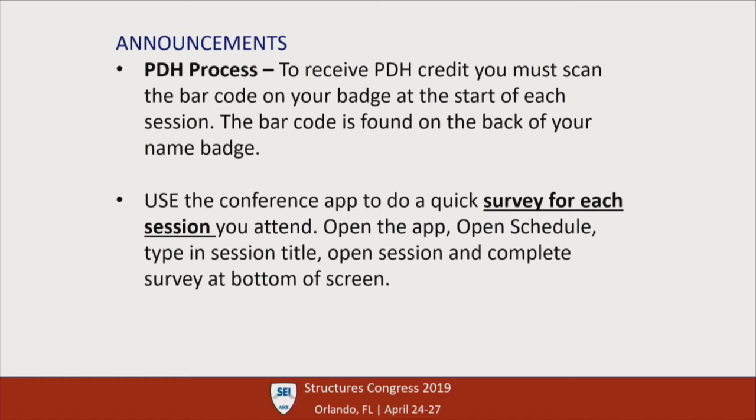This is a live stream session, and today's speakers, I'm going to present them all at one time so that we don't take time from them. There will be 4 presentations.

The first one regarding I-75 over SR-50, Twin Bridges, by Henri Simpson, Principal Associate from Hardesty and Hanson. Second will be the North Washington Street Bridge by Piyush Rohela, project engineer, and Edward Bowman, senior project manager at Alfred Benesch and Company.

The third presentation, Why Are We Building a Bridge Here? The Replacement of the Bonner Bridge, by Dominic Coletti, Principal Professional Associate from HDR. And then the last presentation is about the I-75 Segment Ramp H4 Twin Top Girder Bridge by Leo Rodriguez.

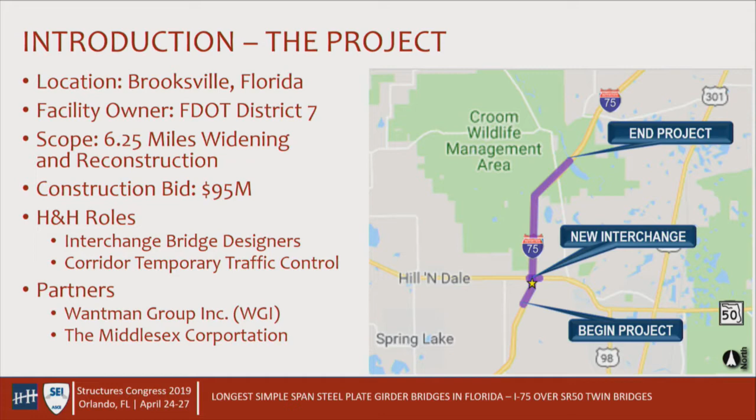So just to kind of establish the needs for the project, the interchange itself was substandard. I think the bottom line really says everything - with the projections of traffic, there will be a level of service of F at that particular intersection. It was one of the traditional urban interchanges you see around. The existing bridge itself had some issues. The clearance, probably the major one geometrically, but really this is more of an obsolescence, a need to upgrade the interchange entirely. There is a history of trucks hitting the bridge because of the low clearance, but the bridge itself had some more service life in it, even though it was from the 60s.

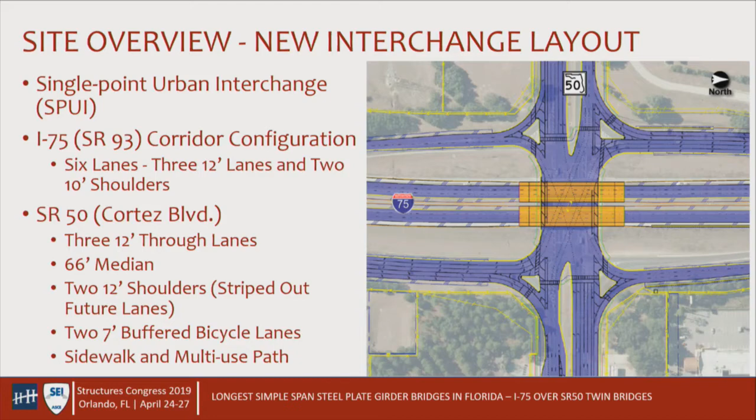Also, if you just think about some of the sight lines from those ramps all the way out there that you need to be able to see through, and those spui's in general, they need to have no piers allowed in that whole blue area below the bridge to allow for those turning movements. So you can see why this bridge is getting long.

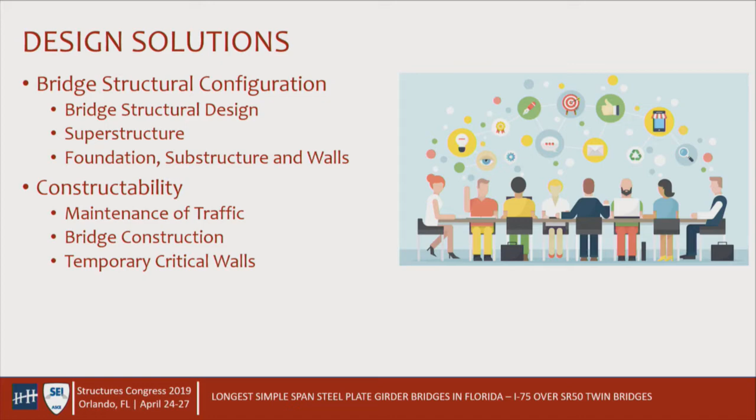So now to try to go through our design solutions, we're going to talk about the bridge itself and why we made these choices, and then how we implement them with the maintenance of traffic and the constructability concerns moving through the project. So the structural configuration. The record number is 298.5 twin simple span bridges. I think we missed the national record by a few inches, but inches matter sometimes.

The bridge width is nothing big about it. It's 59 foot 1 inch wide. That 1 inch is for a half inch that floats around in the parapet widths. We designed it for 6 lanes, but with provisions for future 8 lanes, and also some considerations for the future 10. Vertical clearance was set for the signs and whatnot, and also had to include some live load deflection, which is not normal, and we'll discuss that a little bit more moving forward.

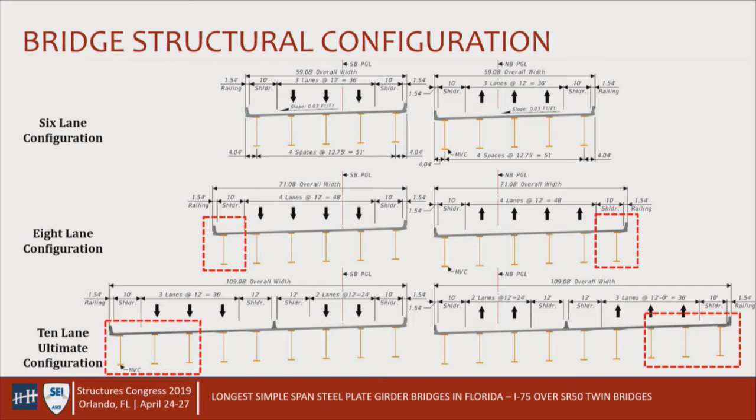So here's a typical section. The 6 lane is what we're designing for and building right now, and we had to think through the 8 lane. The 10 lane was a little bit way in the future, but our provisions can handle the 8 lane configuration. You can see typical sections, there's nothing abnormal about it, so it's just the depth of the beams that might jump out at you. In this case, we have steel plate girders with traditional concrete decks on there.

So with that span length, bearing to bearing length that you see there, we kind of got a little bit into la-la land because the AASHTO distribution factors are limited at 240 feet. So in order for us to responsibly proportion the live loads to those girders, we needed to do some calibration of our own, and it's something that we've done a lot. Leo will talk about it more later too. Using those MDX design type tools, we calibrate it with a CSI model that allows us to have an independent check and make sure that we're not doing anything that we shouldn't be able to do.

And also this live load deflection. Now, in addition to capturing the live load distribution, we wanted to have a check of the natural frequency of the bridge, being that it's that long. We want to make sure we won't do anything that jeopardizes it from a resonance perspective. So the girders are 10-foot 6 deep web. We use grade 50 in the web, grade 70 in the flanges. It's a 1-inch thick web, and the flanges maxed out at about 3 inches.

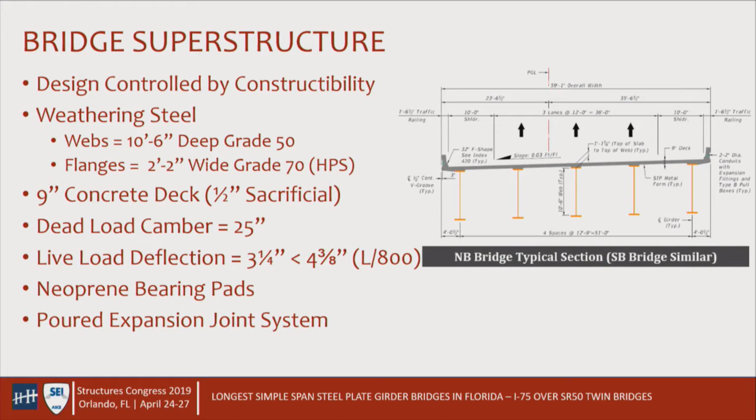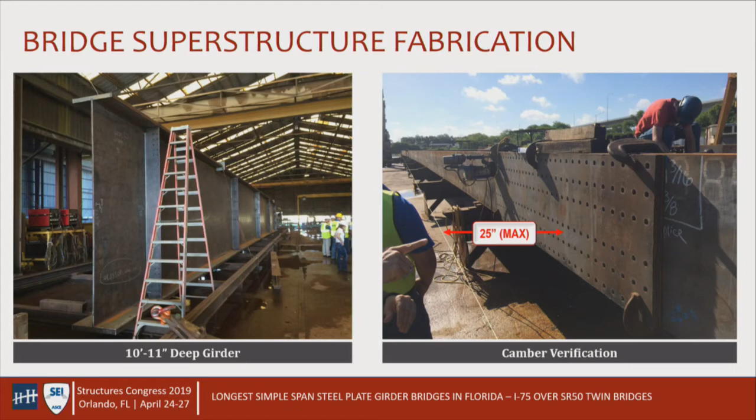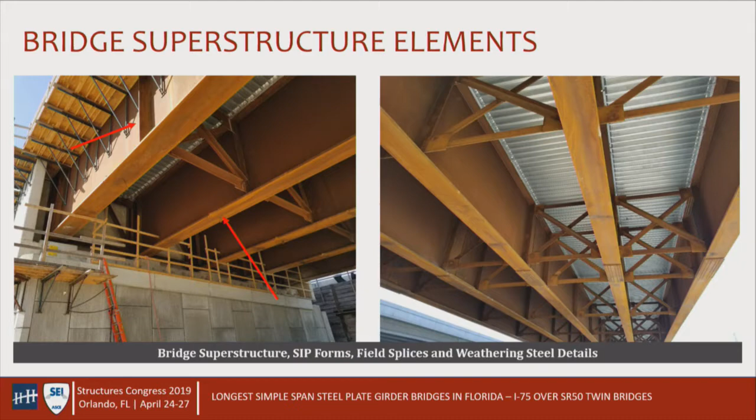Foundations, the foundation itself is just 2 end bents, a single span. We had staggered 24-inch pre-stressed piles, founded on pretty good stuff there, so they didn't have to be too long. The stagger allowed us to not have to worry too much about moment, or overturning on there.

The substructure itself, traditional class 4 concrete 5,500 PSI, and pretty deep back wall because we have to go all the way up to the top of the bridge from those 10-foot girders.

One thing to note, one of the plus issues, is that we actually needed to pour the back wall after we had put all the dead loads on. The rotation at the end of the girders was so much that it actually impacted the back walls, and we had to straighten those up before we could pour those back walls. I'll talk a little bit more about that moving on.

So walls, 30-foot-ish walls that keep the whole structure in the right-of-way. Didn't have enough right-of-way to have slopes. These are proprietary, typical MSE walls you see all around Florida, where you could use steel strips in there since we're not near the water.

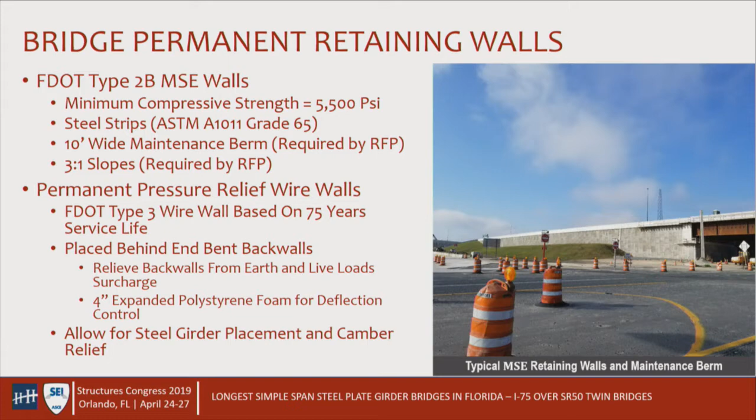And we needed to have some space there per the RFP, the design build. One of the techniques we used behind the back wall was to actually put a wire wall that was going to be buried behind the back wall permanently, to relieve the lateral loads on the back wall since it was so high, and also allowed us to have an embankment fully built and compacted before we even put the girders in place. So it gave the contractor some more flexibility in staging his work, and also allowed us to build that back wall after the deck was poured onto the bridge.

So how do we implement our design? Again, this was a design build contract type, so there's a lot of interaction with the contractor on how we go about doing this.

I won't talk about the drainage requirements too much, but it did control the width of the temporary structure you'll see in a second, because this is an interstate facility, and we need to make sure that hydroplaning and those things are taken care of when we narrow bridges. So we needed to make sure we had temporary drainage considerations.

The steel girder erection strategies was something we worked through a lot with the contractor and the erector. Temporary critical walls to be able to make cuts and give us space to build things. And I mentioned those camber and deflection implications a little bit with the back wall, and we'll talk a little more about that as well.

Now, MOT does drive these projects a lot, keeping that traffic flow on I-75. It can never stop. So in a way, that's one of the big design constraints on us: how do we keep traffic moving in these high-speed facilities while we build these systems.

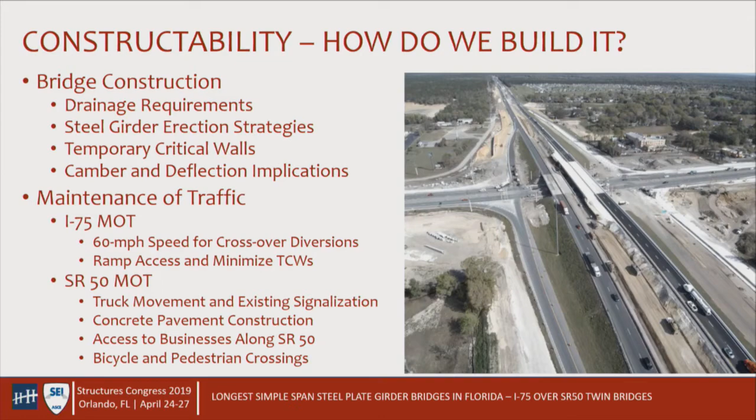So, construction sequence: the contractor built the northbound system first, but in order to do that, we needed to be able to move traffic off of the northbound existing bridge onto the southbound. So we had to widen the southbound bridge to allow 2 lanes of traffic in either direction. There is a temporary widening of that bridge as part of this contract.

Once we widened that bridge and moved traffic over, we were able to make some cuts to make space for this much longer bridge into that position. Just to give you a little perspective of the size, the existing bridge was 174 feet long, 4 spans. So we had to get much more space cleared out right adjacent to that existing bridge, since we were putting everything back on the same alignment to save fill and embankment for the project.

And so there's a lot of wall work here. So once we've got that northbound traffic onto the southbound bridge, we can build the new bridge, move traffic back over, and then do the same to the southbound bridge.

So that's a good picture looking north. You can see the northbound bridge being constructed, and the traffic's on the southbound bridge. So the widening was larger than the existing bridge was, and again, that was because of the drainage requirements, needing to give enough of a shoulder so you could have that spread.

Superstructure and substructure were just basically what was there, the cheapest kit you could get to put out there. But there's a lot of wall systems. What's interesting about the walls is that we use these temporary walls on one face with soldier pile lagging, and then we build next to it with wire wall, and then that wall comes out. So it's almost like a 2-sided wall setup. I'm not sure you can see that here, but that's the approach.

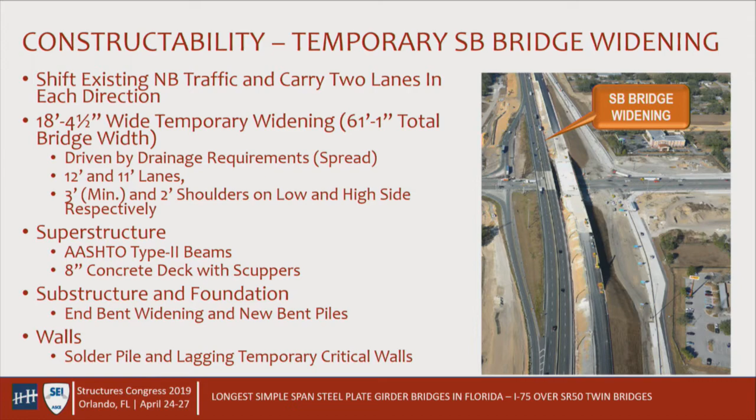So this is your temporary soldier pile and lagging walls, and against that, closer to where the picture's taken, you'll be building up the new embankment with a wire wall, because you're going to have to remove that lagging once we've moved traffic over.

So with the bridge erection itself, one of the innovative things that we came up with during this project was to reuse the existing piers of the existing bridge as temporary shoring. Because we're limited to about 130 foot of length of girder to transport, we need to have a couple of splices to make up 300 feet. And we designed our girders strategically with the existing piers in mind, doing things like putting a stiffener bearing right over the temporary bearing area, and making sure our splices had enough space to be put together outside of the footprint of these piers.

So this saved some time in putting temporary shoring in place, and gave us a pier that we knew was going to work. So in this picture, you can see the existing southbound bridge to the left with the widening, and on the right, this is the northbound with one additional pile to use as that temporary setup.

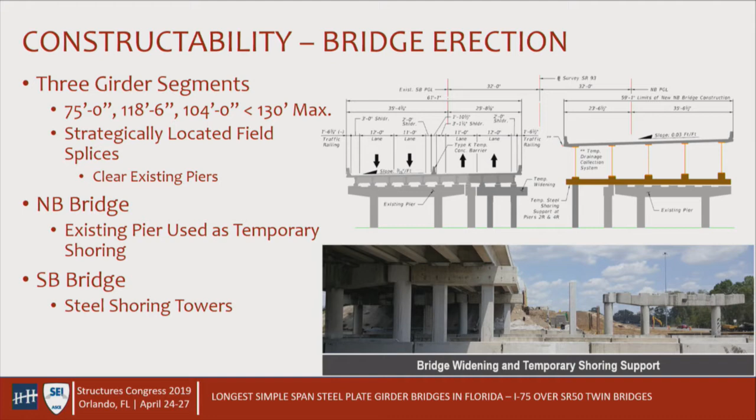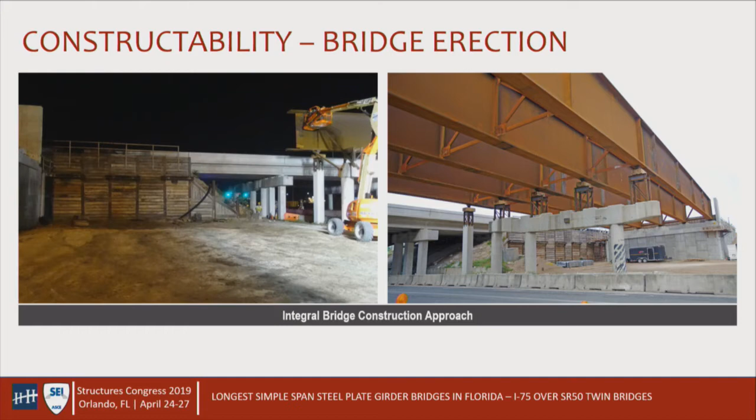And there you have the bridges. Looks like all 3 pieces of the bridge is in place with the temporary shoring of the existing pier. And you can see the back wall in the distance on the right picture is not in place yet, just a cheek wall, so you can see daylight back there. And on the left picture, again, another image of that space we created with that soldier pile lagging wall. So that was a long night out there, but it was very nice to see it get in place.

So here's another one of these plus issues. We were able to use the most durable bearing setup there is, a nice neoprene elastomer. But with the amount of camber and rotation, once you start putting load on that with the deck pour, you start to get a lot of horizontal movement with these bearings. On a shorter bridge, usually those movements are within what's tolerable, and you don't need to worry about the stability of the bearing.

But in this case, we needed to be able to get that deck pour, flatten everything out to where we want to be, and then jack to reset those bearings. We checked all the bearings to make sure they hadn't exceeded their allowable deflection, and if any did, we replaced those, but we reused almost all of them. So you can see some of the movements here from the dead load itself are not trivial movements, and it's something you need to consider dealing with a very long span like this, is how are those end lateral displacements affecting your bearing initial set and back wall.

So in closing, this was a great project for us, very challenging, that in the design build environment, getting to work through these issues with the contractor and vet our ideas directly with the person who's going to be implementing it was great. It is another one of those things that we've seen, that the new demand on right-of-way and traffic service is pushing us into these different interchange configurations, which means that we have to come up with different structural solutions for them. And again, this conventional plus concept - yes, in cross-section and maybe elements, it's a normal conventional project, but there are some things you need to put a magnifying glass on when that plus comes into conventional. So thank you very much.

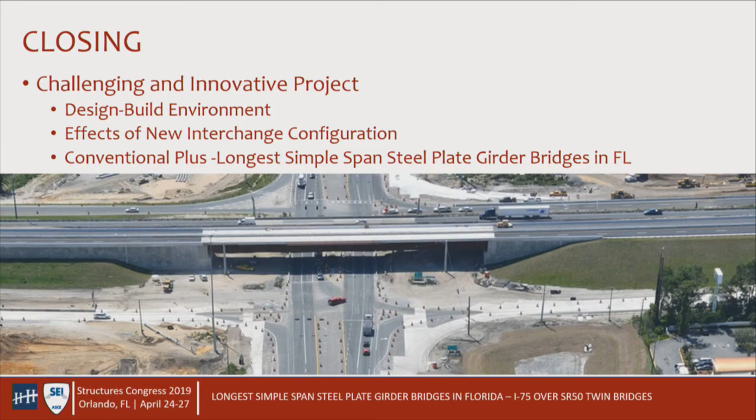Thank you, Henry. Good afternoon, everyone. I'm Ed Bauman with Alfred Benesch and Company. I'll be talking about the North Washington Street Bridge replacement up in Boston. Piyush Raella will come up midway through our presentation and talk about the structure itself. I'm going to focus on the development of the roadway that the bridge carries.

The City of Boston is the owner of the bridge and a major proponent of the project. Mass DOT Highway Division is overseeing the design and construction of the structure. FHWA is our lead federal agency, and all three are participating in the construction costs. Alfred Benesch and Company are the lead structural and civil highway engineers, and Rosales and Partners are the bridge and highway architects.

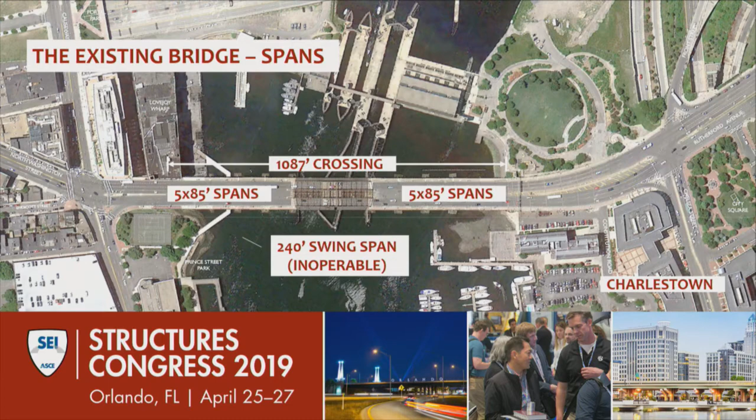The bridge is located between two traffic-signalized intersections in Boston. You can see from this aerial view that a lot of parks have been developed along the Charles River, creating an exciting, up-and-coming area of Boston, and the value that the replacement of this project will help add to the area.

The existing bridge carries 42,000 vehicles per day. It also carries 4 major MBTA bus routes, as well as healthcare shuttles in the area. A recent study identified this corridor as a hot spot for major delays for bus travelers, and while buses make up only 3% of the vehicles, they could carry up to 34% of the users of the bridge. There are also cyclists and pedestrians crossing the bridge.

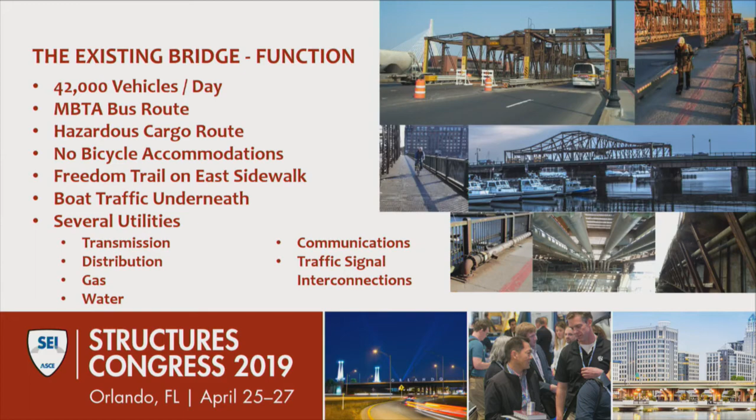The bridge has been in service for about 120 years. The marine environment is extremely corrosive, and the city has been spending about $2 million a year for the past 15 years maintaining this structure to keep it open to traffic. A lot of steel repairs happen, and every inspection cycle brings new repairs. Eventually it was decided to replace the structure completely.

Since this structure is considered eligible to be listed as a historic place, a replacement triggers a Section 106 review of the National Historic Preservation Act. This review is a collaborative effort between FHWA, the State Historic Preservation Officer, Mass DOT, the City of Boston, local historic commissions, and the Native American councils. The result of this process is a memorandum of agreement listing design requirements to allow the replacement of this potentially historic structure. The requirements for this project are to create a gateway bridge, provide a context-sensitive design, and distinguish the structure as a place in itself.

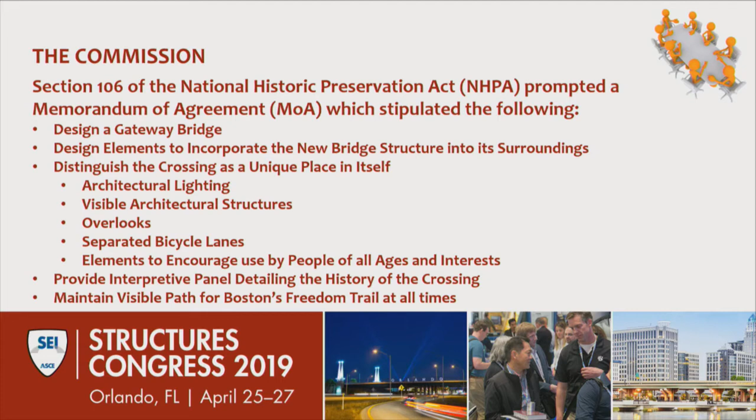They recommended architectural lighting, architectural structures, overlooks, and a separated bike lane. They built into this memorandum the need to provide elements to encourage use by people of all ages and interests.

This memorandum of agreement is consistent with Mass DOT's healthy transportation policy and statewide Complete Streets program. A Complete Street is defined as one that provides safe and accessible options for all modes of transportation—walking, biking, transit, and vehicles—and for people of all ages and abilities.

This Complete Street design is also another collaborative effort with MassDOT, City of Boston, MBTA, which is our transit authority, DCR for the parks in the area, and all the advocacy groups for pedestrians, cyclists, and transit users. The result of this effort was 57.5 feet, that's how close we got to negotiating every foot of width of this space.

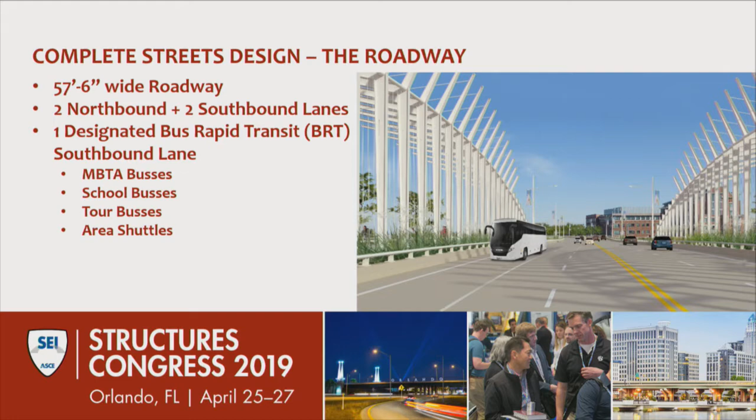On the other side of the planters, we decided on having a 7-foot wide bike lane in each direction following the traffic direction. The 7-foot width allows for faster cyclists to pass slower cyclists. There is a 3-inch high vertical curb that provides vertical separation between the bikes and the 10.5-foot wide sidewalk on each side of the bridge.

And that pedestrian railing is an aluminum stainless steel illuminated railing system.

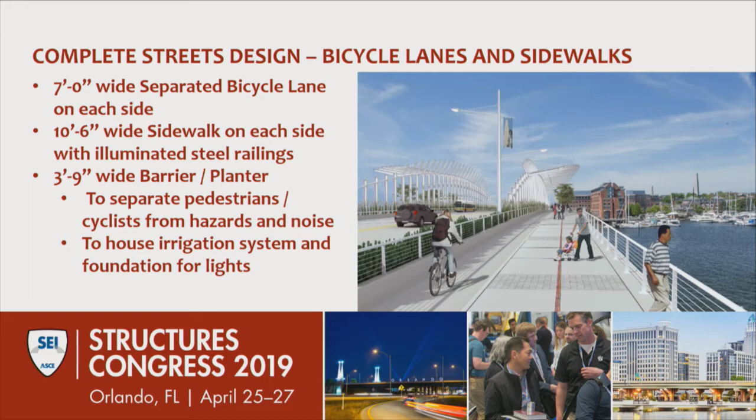And then the sidewalks widen up to 19 feet to create those overlooks, which will have tree planters and benches to allow a place to rest across the bridge, get some shade halfway across the bridge, designing for someone who is 8 and 80. So if you need a place to rest halfway across the bridge, we have one.

And there'll also be landmark plaques describing the views from the bridge. There's the Bunker Hill Monument on that view there.

Since this bridge had to be designed in the context of the area, it could not compete with the Zakim Bridge. The Zakim Bridge is such a massive structure, it couldn't contrast or compete with that. So this bridge was viewed as a viewing platform for all the views of the area. So the unique structure had to come from the substructure of the bridge.

If you've seen the Zakim Bridge, it has 300-foot high inverted Y pylons. And you'll notice the architect built in an inverse of that with V-piers for our structure.

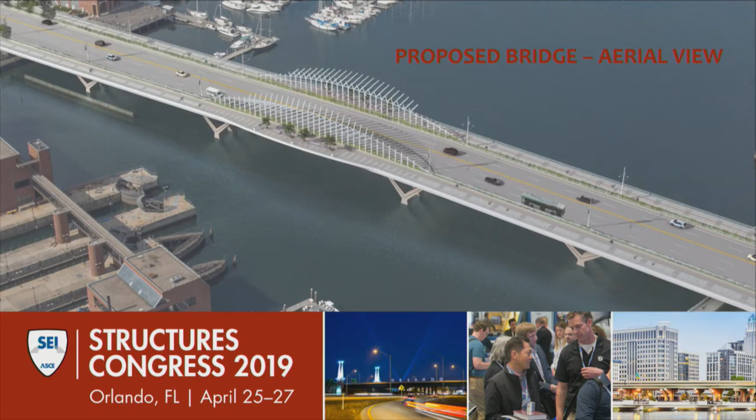Both the architectural trellis and the V-piers will have accent lighting, so they can light up the area and match the lighting on the Zakim Bridge, which changes colors due to the holidays or sporting events.

And now I'd like to invite Piyush to come up and talk about the bridge structure.

Thank you, Ed, for providing us context to this bridge's design with these mesmerizing, very colorful renderings. Now we move on to the more black and white portion of the bridge design, or if you attended the plenary session today morning, the part of the presentation where we say structural engineering inside.

The choice of the cross-section of the bridge was determined by two factors: the use of conventional methods of construction and a high score on constructability. The geometry of the cross-section, however, and the layout of a lot of the cross-section elements you see here were determined by two high-pressure fluid-filled transmission lines that were going under the west sidewalk. These not only could not be moved anytime during the construction of the bridge, but also had to be supported every 10 feet throughout the duration of the entire project.

The steel box girders were chosen for their high torsional rigidity and for a shallower profile compared to the I girders. They were also 6.5 feet deep to allow convenient inspection in the future.

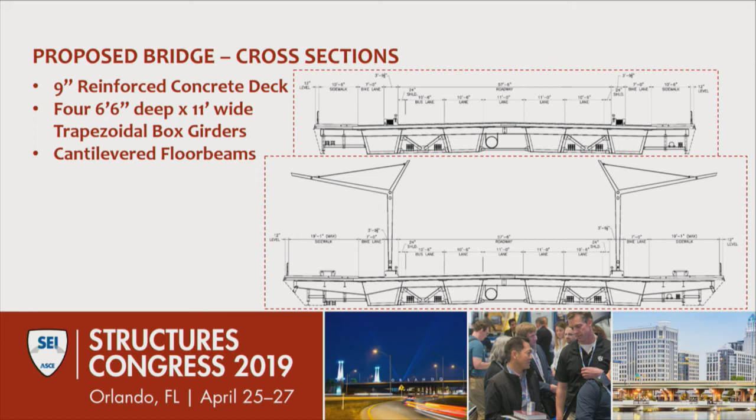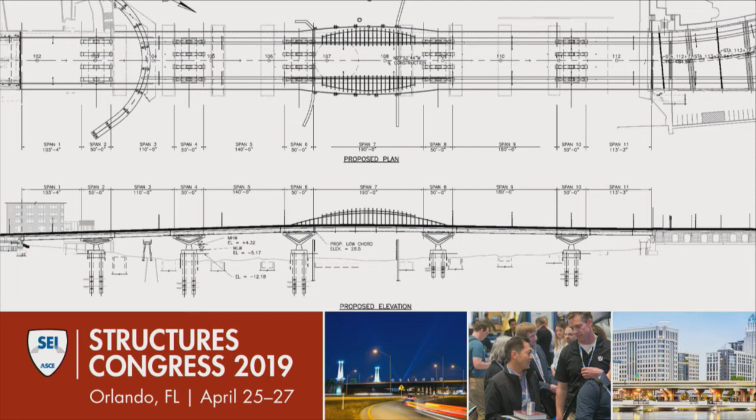The city of Boston is known for a lot of things. However, good soil profile is not one of them. Under 30 feet of water lies 30 feet of silt and clay, below which we find some quality glacial till. The 30 to 80 feet deep drill shafts were rock-socketed, or would be rock-socketed, 10 to 27 feet into the rock strata to get the desired geotechnical resistance.

Here you can see several views of a typical V-pier. Underneath each girder is one V, which is supported on one column. And 4 Vs constitute one V-pier. They are supported on a 5-foot thick drill shaft cap, and underneath are 8 6-foot diameter drill shafts.

The way the tie beam ties the arms of the V-pier is shown on the left. In stage 1, a precast tie beam is just placed on a shelf created on top of the arms. The post-tensioning threaded rods are put in, and it's post-tensioned to 300 kips. What it does is bring the arms closer together and help later on when the dead load is added. After the first stage of post-tensioning, the joint between the arms and the tie beam is grouted, the closure pour is completed, and an additional 2,000 kips of post-tensioning is applied.

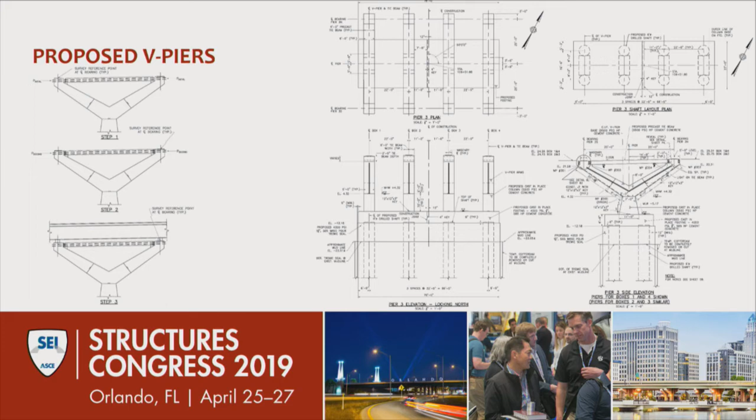Next, the ducts are grouted, the steel is erected, and then comes the deck pour.

The cofferdams were designed to minimize the time spent in water and to minimize the overall footprint of the foundation. On the top right, you see the proposed platform that can be used to create and support the V-pier arms.

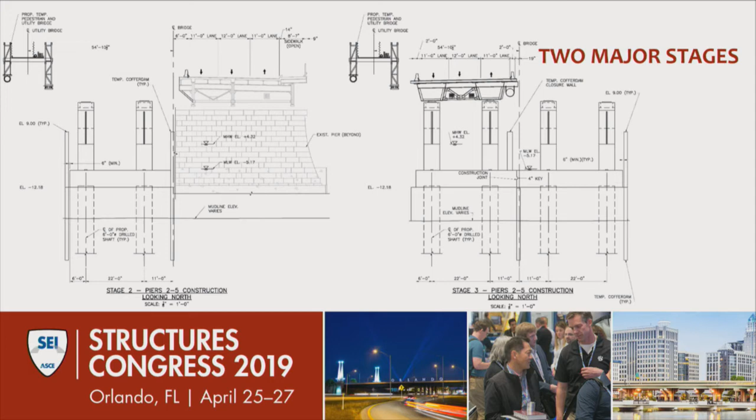The box girders also allow 2 major construction stages where half of the bridge longitudinally would be acting as an independent structure itself. On the left of both these views is the temporary utility bridge, which would be in place throughout the construction of the new bridge.

Midas Civil was used to create 2 full bridge models, one with the substructure and one without. The model without the substructure was used to design the superstructure. A separate model in MDX was independently created, and the similarities and differences of the results were analyzed until a good confidence level was reached. The model with the substructure was used to determine the forces for substructure design because that accounted for rotations of the pier as frames themselves.

After the forces were determined, the substructure was independently analyzed and designed using Midas Civil and STAAD. LUSAS was the software of choice for seismic analysis.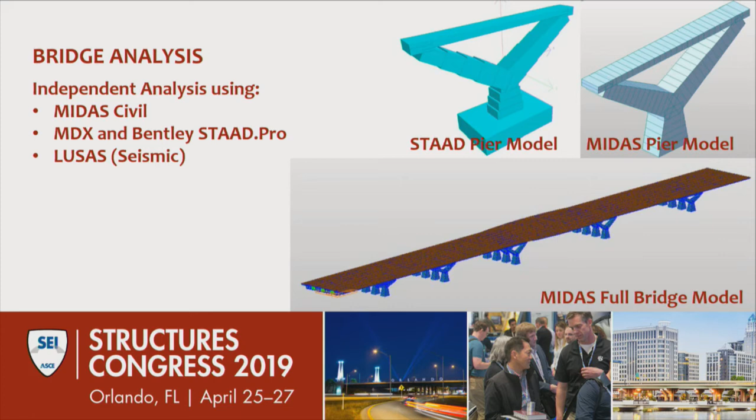Here we can see the rebar arrangement on the left at the top of the arm. You can see it's really congested. It also shows a 12-inch long closure pour with the tie beam, and below that is a shelf where the tie beam is initially placed before it's post-tensioned and grouted.

On the top left, we can see the cross-section of the tie beam again. It shows currently 8 post-tensioning threaded rods, which have now been updated to 10 to introduce more post-tensioning up front. On the lower left, you can see the typical cross-section of the V-pier arm. What's interesting is that the reinforcement in the arms is offset laterally so that it can cross each other clear at the base of the V, as seen on the right.

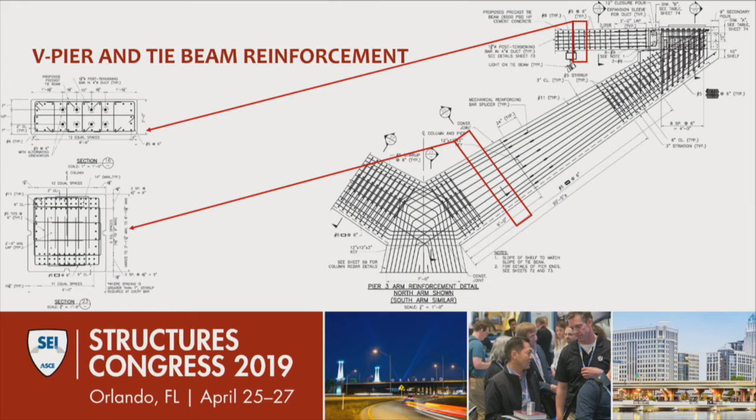This is a similar cross-section, except it's at the center of the bridge where it is at the widest. Notice the 19-foot, 1-inch wide sidewalks, deeper floor beams to carry these long cantilevers, and extra stringer to support the widened sidewalks.

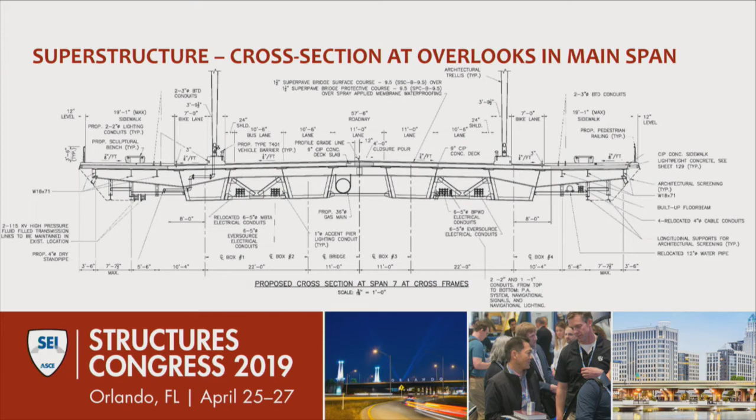Another similar detail, except at the widest portion of the bridge, with a really long cantilever and an additional stringer to support the widened sidewalk.

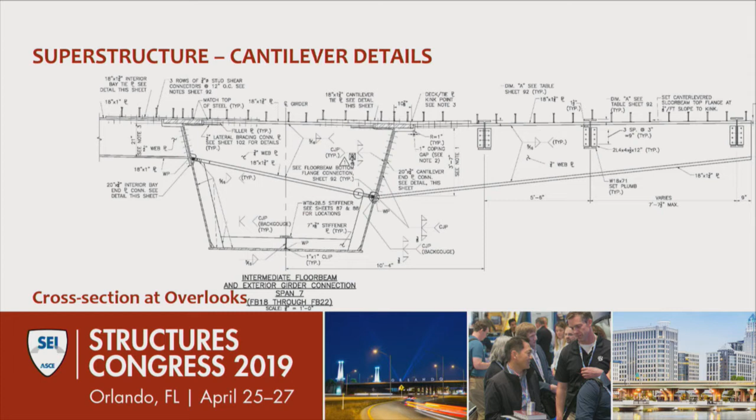The barrier consists of a T401 rail for the vehicular side of the bridge. The wall on the right is for the bike lane, and it houses electrical conduits. The longitudinal planter that runs for the full length of the bridge is shown in the middle with a complete irrigation system. The barrier also provides support for lighting and architectural trellis.

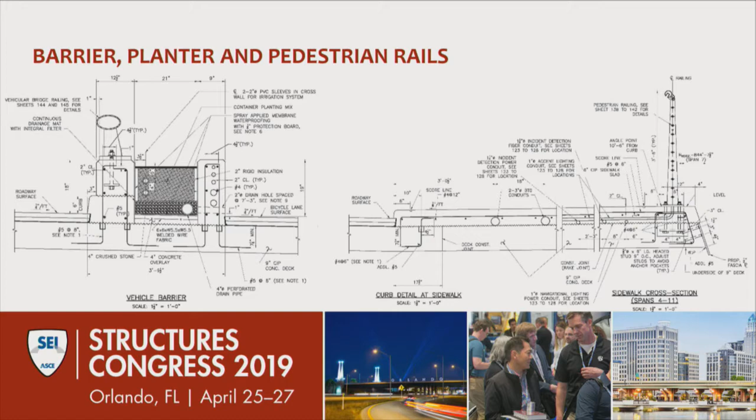Currently, the project is in stage 1, where the construction of the new temporary bridges is underway, and we hope that by the spring of 2023, the renderings that we showed today would come to life. Thank you. This concludes our presentation, and over to Dominic for the next.

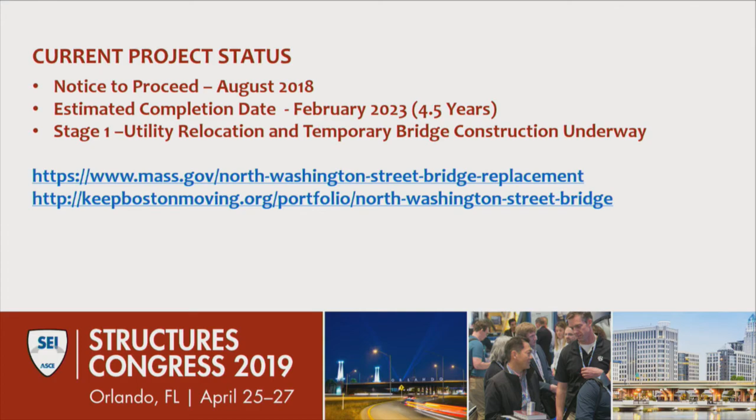I'm with HDR Engineering, and HDR was fortunate enough to be the lead designer on a design-build team led by PCL Civil Constructors for an NCDOT project to replace the Herbert C. Bonner Bridge over Oregon Inlet on the North Carolina Outer Banks.

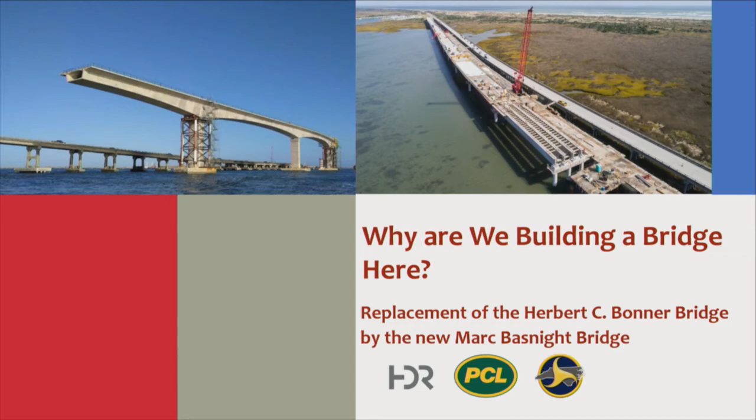The title of this presentation is Why Are We Building a Bridge Here? You'll see why I chose that title in just a minute. As we go through the outline here, we're going to ask that question first.

When you think about it, this is really kind of a crazy place for a bridge project. We're basically building a bridge between two sandbars right on the Atlantic Ocean. We're going to see how some conditions, constraints, and criteria affected some themes that we followed as we entered the design of the bridge. Then we'll show you how that design played out, the final product, and show you some construction photographs, and wrap things up with a quick summary.

So let's begin by asking that question: why in the world are we building a bridge here? There's three main reasons. The first is the mantra of the realtor: location, location, location. The second is the mantle of history, a sense of tradition at this site. And third is the answer you get when you ask somebody why they climb a mountain: just because we can.

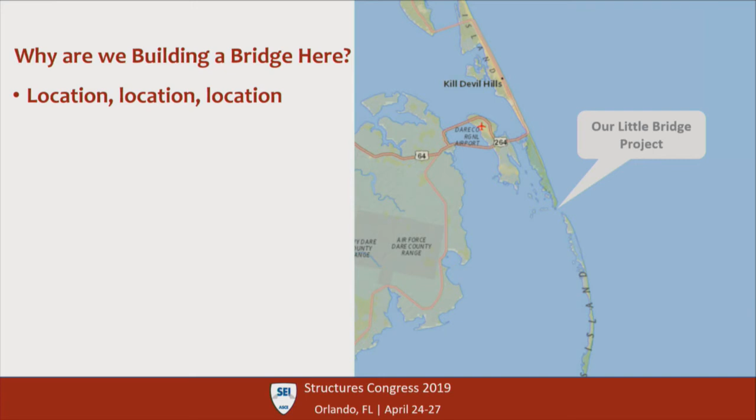So let's begin with that first reason, the location of the project. If you haven't been to the North Carolina Outer Banks, it's a 200-mile-long string of barrier islands on North Carolina's Atlantic coast. It's a beautiful area, with beautiful beaches, pristine natural wildlife environment, and great sport fishing. It's been a destination for a lot of people for a long time.

There's a lot of history at this site. The Oregon Inlet itself originally opened back in 1846 when a storm blew a breach in the Outer Banks Islands. People have been coming to the Outer Banks for a long time since that time. For a long time, the only way they could get around through the Outer Banks Islands was by ferry service. North Carolina Department of Transportation helped to aid that a little bit when they completed the construction of the Bonner Bridge in November of 1963. About 2 years later, they were out there again starting to do maintenance and repairs.

This is a really harsh environment to have a bridge. They were seeing a lot of scour, a lot of severe deterioration. This bridge became a constant maintenance nightmare for the next 50 years. To add insult to injury, in October of 1990, a dredge broke loose during a storm, struck the bridge, and took down 6 spans, cutting off access for several months.

It was around that time that NCDOT got serious about coming up with a permanent replacement for the Bonner Bridge, and began a planning project that extended for over 2 decades. It wasn't until 2011 that they were able to award a design-build contract to PCL Civil Constructors to replace the bridge.

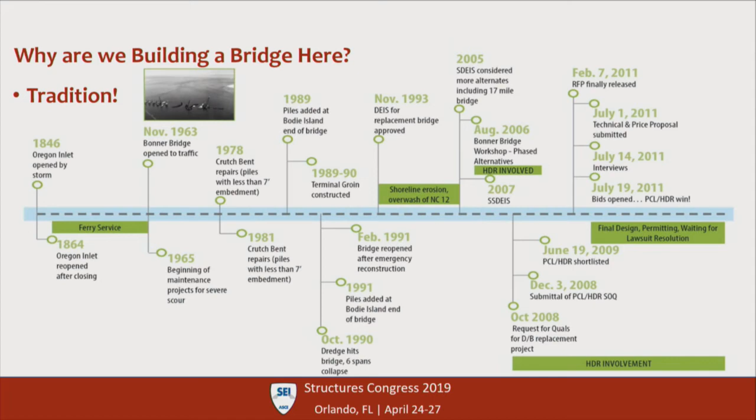Finally, the last reason why we'd want to build a bridge here is just because we can, because we're engineers and we love a challenge. There are plenty of challenges at this site. Lots of constraints. We were dealing with very weak soils, very deep foundations. Those foundations are subject to very severe scour, as you'll see through the course of this presentation. And there were, of course, a lot of stakeholders. A lot of people wanted to have a say in how we designed and built this bridge. We also were facing a lot of goals, sometimes competing.

NCDOT, for their part, wanted to have a very durable structure, one that would be low maintenance and have a long service life. PCL wanted a bridge that was very constructible, a structure that they could build easily in this very harsh marine environment. And everybody wanted an economical bridge, one that could be built for a reasonable cost.

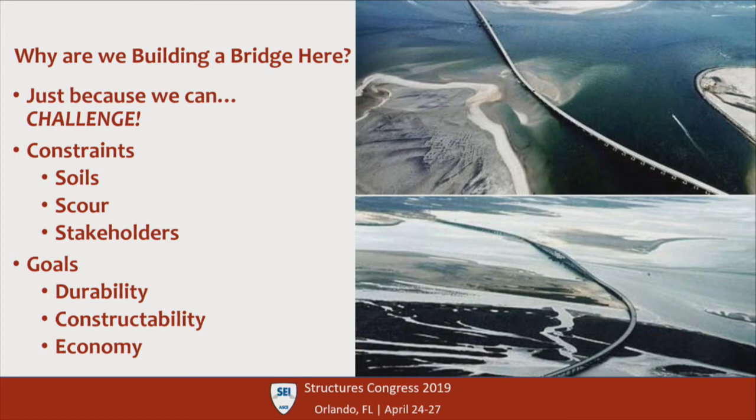Now, I mentioned scour as one of the primary drivers in this project, and I want to help illustrate why that's so important here, and to show you the nature of the project site. Oregon Inlet is one of the most dangerous inlets on the Atlantic coast. It's a highly dynamic inlet with very regularly changing bathymetry. The best way to show that is through a series of aerial photos taken over time.

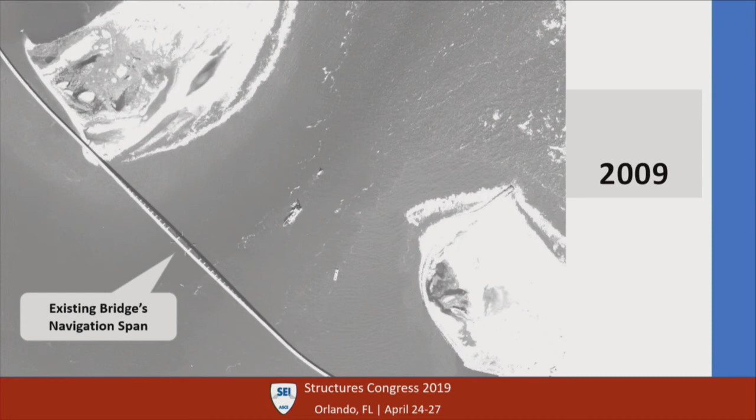Now, as we walk through time, you can see that the inlet changes shape and size dramatically. Bodie Island moves further south, further north. The inlet closes up, it opens up again. This is one of my favorite photos.

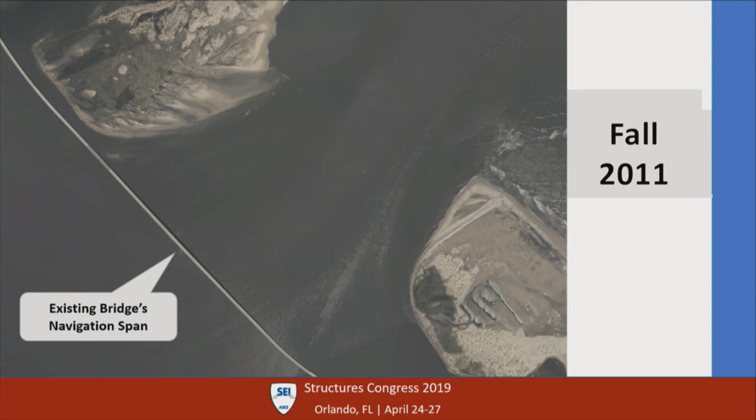Not to fear, Mother Nature to the rescue. Along came Hurricane Irene, blew the inlet wide open again a few months later. Really a dynamic place, lots of challenges here. We're going to see how some of these challenges affected how we approached the design of the bridge next.

I'd mentioned lots of different conditions, constraints, and criteria that we were working with. We tried to always keep in mind that we were building a very long bridge, 2.8 miles long. We wanted to see a lot of repetition so that we could get some economy of scale in the design. We always had to remember that we were working in a very remote location. Access for delivering construction material, equipment, and so forth is really challenging at this site.

We were building in 3 different construction type sites. We had overland construction, we had construction over shallow water seagrass beds, a submerged aquatic vegetation area, and then we had deep water construction out in the inlet. Out in the inlet itself, the design had to accommodate a 2,400-foot wide navigation zone. Anywhere within that 2,400 feet, the bridge had to provide a minimum 70-foot vertical and 200-foot horizontal navigation clearance.

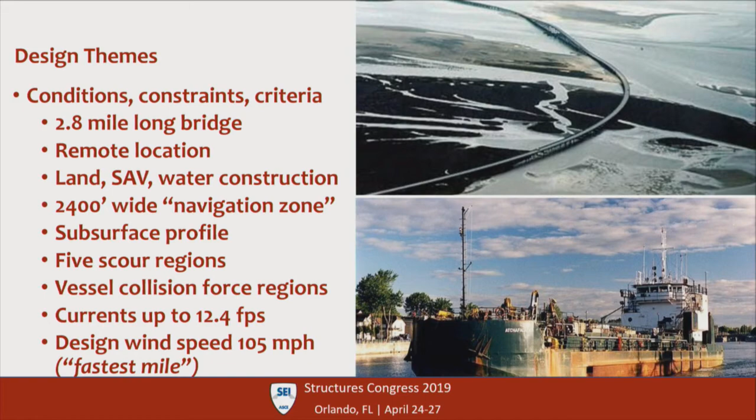We had that challenging subsurface profile with the loose sands extending very deep. We had that scour to worry about with 5 distinct scour regions, and we had the design for a lot of horizontal forces, vessel collision, currents that are generating a lot of water and wave forces, and a faster than normal design wind speed of 105 miles an hour, and that's under the old AASHTO fastest mile of wind criteria.

NCDOT really wanted to have a very durable bridge here, and they made sure that it was clearly communicated in the RFP. They began with a basic criteria of a 100-year service life, and then they went down into some more prescriptive requirements and prohibitions. They prohibited the use of structural steel anywhere on the bridge, no structural steel girders or piles. They specified that any cast-in-place concrete had to be reinforced with solid stainless steel reinforcing. You can see some of that in the lower right photo there.

Keep in mind, stainless steel reinforcing costs 3 to 4 times as much as regular black reinforcing, so this was a pretty onerous requirement. They also specified that any post-tensioning in the substructure that was within the splash zone up to 12 feet above mean high water had to be stainless steel post-tensioning. But they did give us a break in a few places. They allowed that precast concrete could be reinforced with regular carbon steel, black reinforcing.

The concrete itself had a very prescriptive mix design with high percentages of fly ash or ground granulated blast furnace slag, silica fume, and calcium nitrite corrosion inhibitor. This made for a very robust, very durable concrete mixed design, one that's very resistant to corrosion, but it's also a mixed design that's very difficult to work with in the field.

Early on in the project, we keyed in on the need to extensively use precast concrete. This allowed us to minimize the quantity of that very expensive stainless steel reinforcing. It also allowed us to achieve much higher quality fabrication. All these precast elements were fabricated off-site under controlled conditions rather than in the harsh salt spray environment of Oregon Inlet. This also allowed us to achieve a lot more reliability and a lot more improved durability. That high quality fabrication led to a much more durable, long-lasting structure.

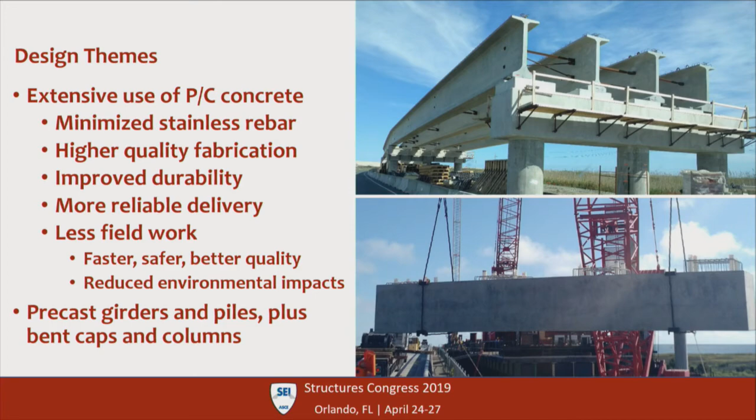We got much more reliable delivery since we were delivering precast elements rather than worrying about whether a traffic jam or some other incident would delay delivery of concrete trucks. Overall, it also led to a reduction in the field work, which made things go much more quickly, much safer, and much higher quality construction for PCL working in that harsh marine environment. And as a bonus, we were able to greatly reduce environmental impacts by reducing the chances for concrete spills and so forth. To that end, we precast everything we could on the project, not just girders and piles, but also

Remember, we mentioned we wanted to have a design with a lot of repetitive elements to achieve economy of scale. We tried to limit ourselves to very simple elements, and just a few of them. We had 2 main foundation types, a 54-inch cylinder pile and a 36-inch square pile. 3 main substructure types, a very economical all precast pile bent system, a 2-column bent system, and then precast post-tensioned hollow single-column bent. We had 2 main superstructure types rather.

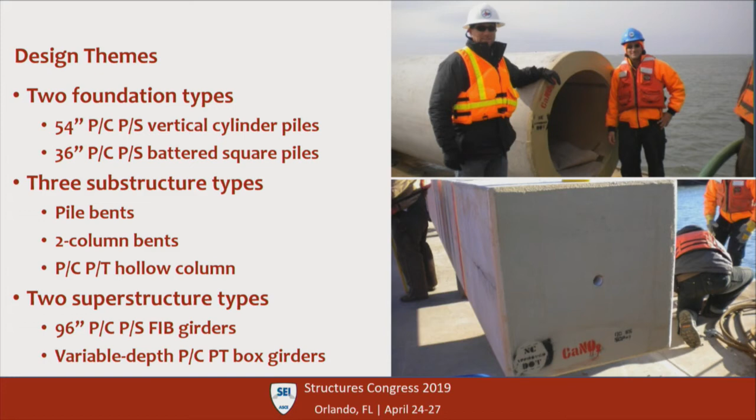Most of the bridge uses 96-inch deep precast pre-stressed Florida I-beams. And then when we're up in that high-level, long-span navigation zone structure, we had a variable depth, precast post-tensioned concrete box girder. Now we took those few elements and we started to assemble them into different combinations so that we could tailor the design of the bridge to the unique needs of each one of those 5 regions that we had identified based on the span length requirements, the structure height, the scour depth, the vessel collision forces, and so on.

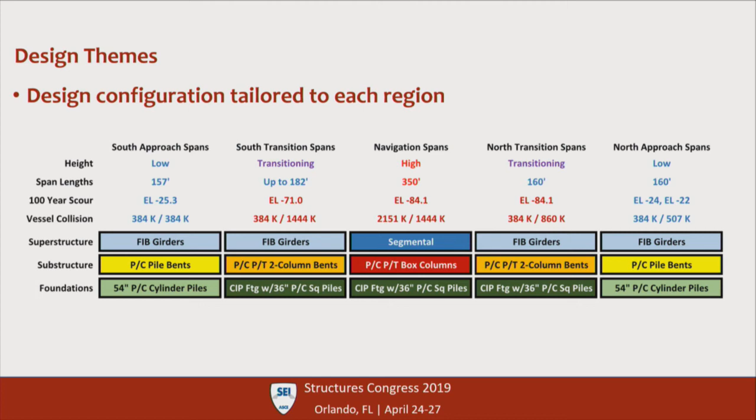You can see how we pieced together the design using those few simple elements to come up with a design that used a lot of repetition, very simple elements, but was tailored to the unique needs of each one of those design regions. We're going to see next how those themes played out in terms of the final design and construction of the bridge.

We're going to begin in the north and south approach spans. These are low-level structures starting from the ends of the bridge and coming up towards that high-level navigation span. The north approach span in particular is a pretty significant structure, extending about 1.5 miles. It's a very simple structure with a cast-in-place concrete deck and precast 96-inch deep Florida I-beams, resting on that highly economical all-precast pile bent system with a precast bent cap and 3 or 4 of those 54-inch cylinder piles, all oriented vertically.

For any kind of structure like this that's subject to very high lateral forces, vessel collision forces, wave forces, wind loads, and deep scour, where you've got a deep depth down to the point of fixity of the structure, you need to take a long, hard look at doing a very refined soil structure interaction analysis to really help optimize the design. We did that throughout the project, and each and every one of the bents has multiple FB multi-pier models. We modeled different scour depths, different loading conditions, and so forth.

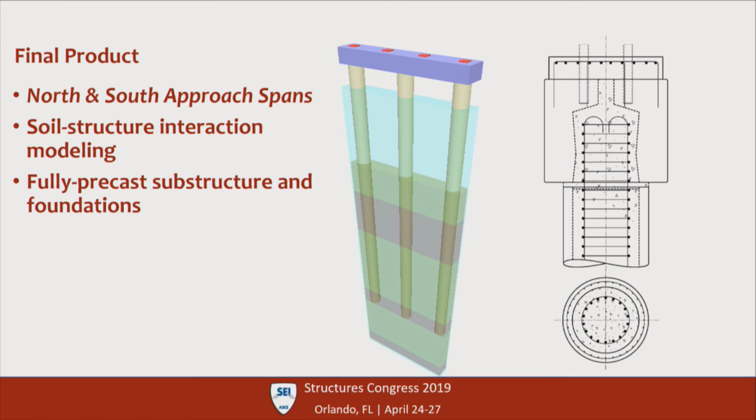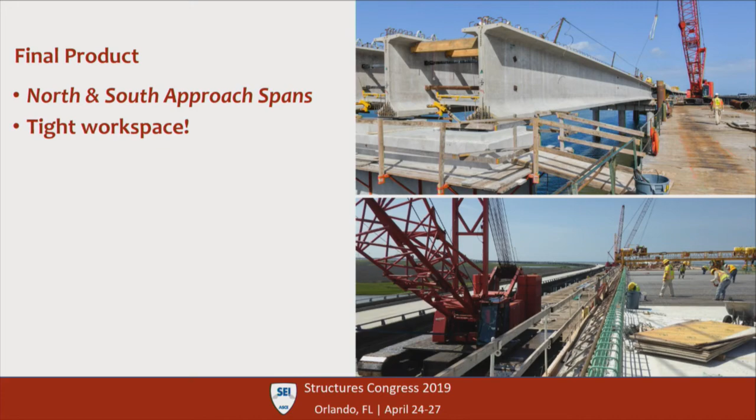This allowed them to limit the amount of work trestle material they had to invest in the project, but more importantly, it was a big hit with the environmental agencies because it minimized the temporary environmental impacts caused by that work trestle. There was a price to pay though. Once you cut off your access to land from that work trestle, all material delivery had to come from the existing bridge. You were also limited in the work area from that trestle, working in a very narrow corridor between the existing and new bridge. The cranes are fairly big to pick up the large precast elements, and they take up nearly the full width of that workspace.

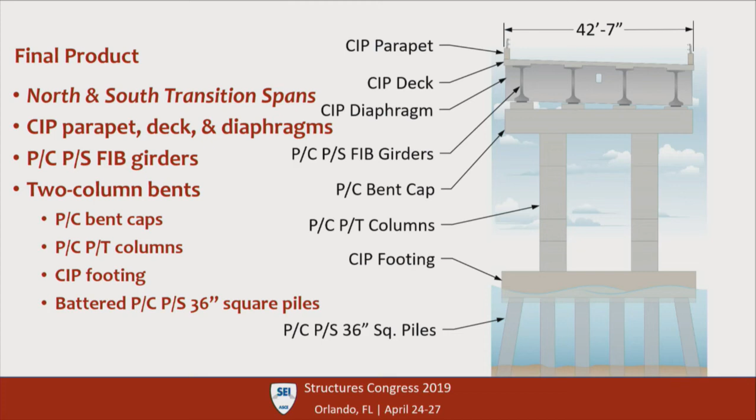As we move along from the north and south approach spans and start transitioning up to the high-level structure, we go through two regions called the north and south transition spans. Here we have that same economical superstructure with a cast-in-place deck and precast Florida I-beams, this time sitting on a two-column bent with a precast bent cap and precast post-tensioned solid columns. Those columns rest on a cast-in-place footing with multiple 36-inch battered square piles. We started using this foundation system as we got into deeper water with deeper scour and higher vessel collision forces, with extensive use of soil structure interaction analysis needed to dial in the design of each foundation.

Here's a couple of photos showing construction of the south transition spans. All of this work was done from barges out in the deeper water of Oregon Inlet. There's some fairly long spans here in the south transition span region - these Florida I-beam girders that we placed spanned up to 182 feet, the longest simple span precast girders in North Carolina.

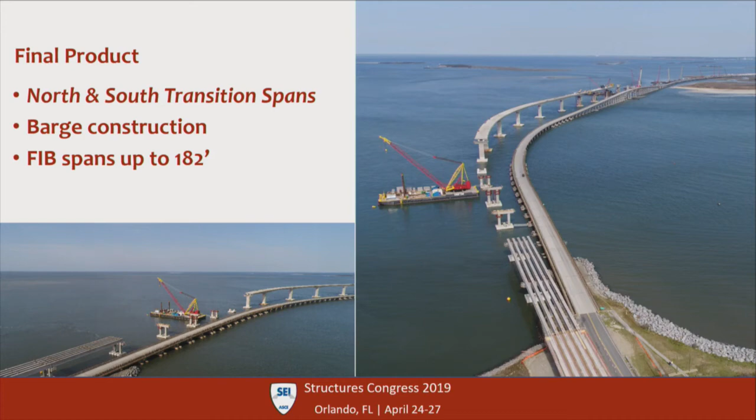Finally, we got to the high-level navigation spans. This is the part that everybody's interested in - the sexy part of the project. Here we have a precast post-tension segmental concrete box girder superstructure, supported on single-column bents with a precast pier cap, precast post-tensioned hollow box columns, and a cast-in-place footing with multiple battered 36-inch square piles. Here, that soil structure interaction analysis was taken to one more higher level. This navigation unit is a single continuous 3,550-foot long precast post-tension concrete box girder structure.

It's subject to very high wind loads because it's a fairly long span and deep structure. It's got high vessel collision forces, and perhaps most importantly, it has very significant creep, shrinkage, and thermal deformations. It's 3,500 plus feet long, so the movements are very significant.

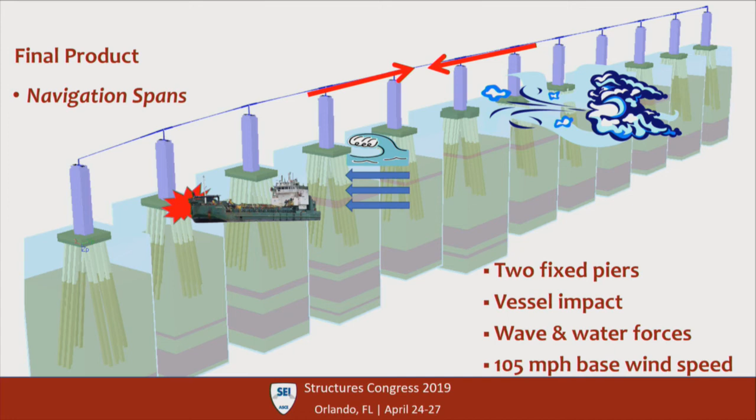The designers had to go through multiple iterations just to determine the number of fixed piers to include in the structure, balancing the need to have enough fixed piers to carry force-driven longitudinal loading effects like wind loads and braking loads, while allowing enough freedom, enough free bearings to accommodate those big deformations. The designers went through 14 complete design iterations before they settled on the final design here.

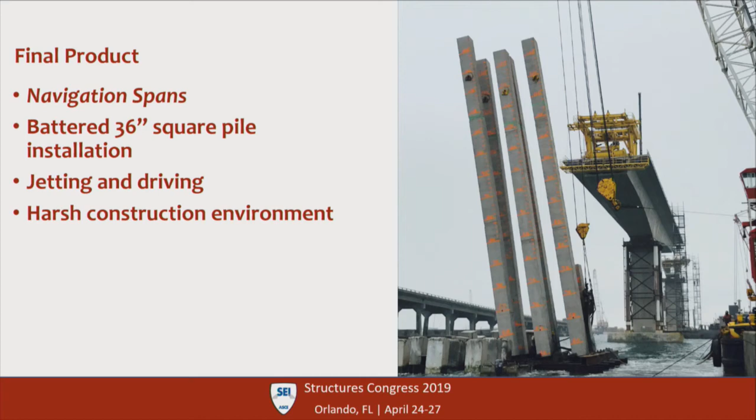PCL exercised some innovation here as well, especially with the foundation construction. It's kind of neat to see how clever contractors can be when they're faced with a challenge.

For each one of these foundations, they began by driving steel piles into the inlet, established a fairly conventional-looking steel template, but then they really got innovative and installed some oversized steel casings that they could easily vibrate partway into the inlet's ground. And they could do that easily, which allowed them to very carefully control the constructed geometry of those casings. Once those casings were in place, they could install the 36-inch square piles.

They would trip them into those casings, jet them down to nearly their tip elevation, and then drive them the remaining 10 or 15 feet. That allowed them to maintain very good control of the constructed geometry of those piles, which was critical for the rest of the construction of those footings.

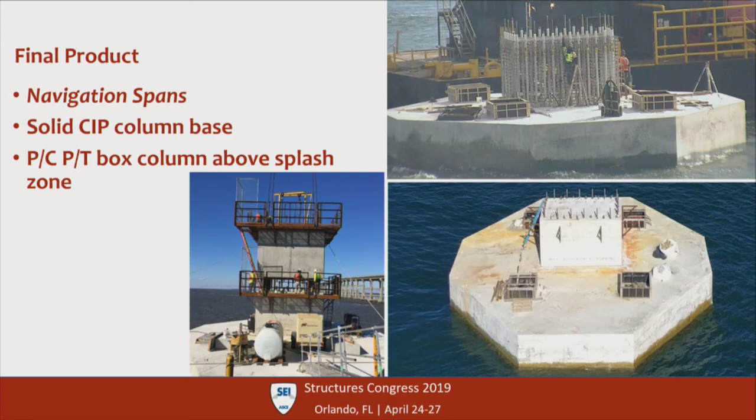They would build those footings next. They were up to 8 feet thick, a lot of mass concrete construction, and then they would start construction of the columns themselves. You can see in some of these photos the stainless steel post-tensioning and stainless steel reinforcing. They would have a cast-in-place solid base and then begin construction of the hollow precast box sections, match cast construction, as they would erect the columns.

Then they would begin construction of the balanced cantilever segmental concrete box girder superstructures. The cantilevers extended 175 feet in each direction before they would reach out and come close to the cantilever from the next span, at which point they would cast a 4-foot closure pour. Really dramatic construction techniques, not something that's commonly used in North Carolina.

With that, we're going to wrap things up here.

As I mentioned at the beginning, the basic question we wanted to answer was why in the world would we want to build a bridge here? It's kind of a crazy place to build a bridge. A lot of challenges here that affected how we approached the design of that bridge. And we showed you how those challenges framed the approach to the design and how we used a very few simple repetitive elements, but combined them in unique ways to tailor the design to the unique needs of each one of the regions of the bridge.

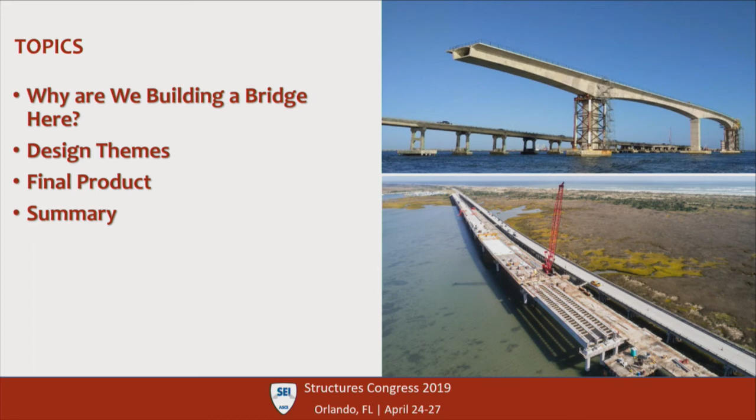We showed you the final product, how things played out in the design and the construction, and we're going to wrap things up with a few quick statistics.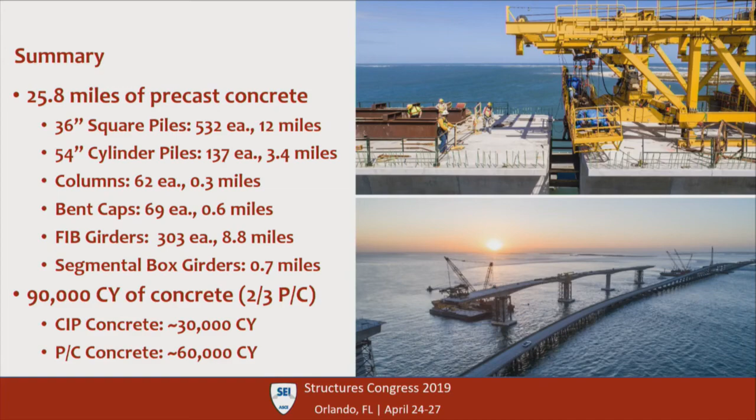Our geotechnical engineers were sitting around one day and started counting up how many piles they had designed. They had designed some 600 plus piles, 12 miles of the 36-inch square piles and 3.4 miles of the 54-inch cylinder piles. At that point, the bridge guys got jealous. They started adding everything up. We ended up with 25.8 miles of precast concrete, over 90,000 cubic yards of concrete, 2/3 of it precast.

The project is coming along very nicely now. They had an opening ceremony just a few weeks ago, April 2nd. The bridge was open to traffic on February 25th. And PCL is basically down now to just a few punch list items on the new bridge, and they're working on demolition of most of the existing bridge.

Most of it's going to be cut up into pieces, barged offshore, and used for artificial reef sites. And they'll leave about 1,000 feet at the southern end of the existing bridge as a pedestrian structure, fishing pier, and as a training structure to help anchor the southern end of Oregon Inlet to prevent further migration.

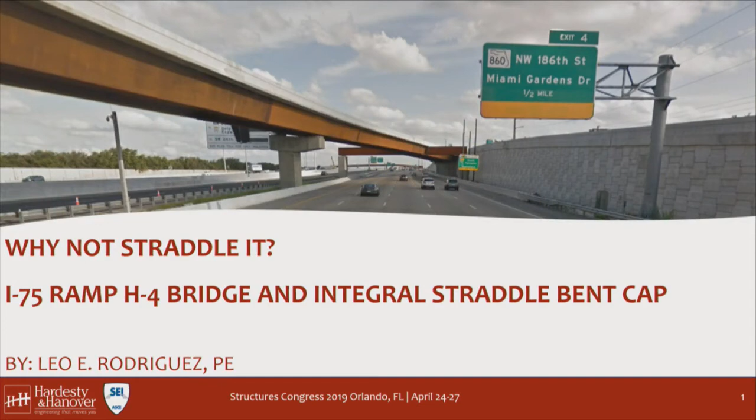Representing the I-75 Ramp H4 bridge and the integral straddle bent cap. Today's agenda will include some introduction of the project, some of the project needs, a site overview, and some of our design solutions.

The project is located in Miramar, Florida, and it is owned by FDOT District 4. Ramp H4 is part of the Segment AB project, which is one of the largest and most complex segments of the I-75 express lanes being built in South Florida.

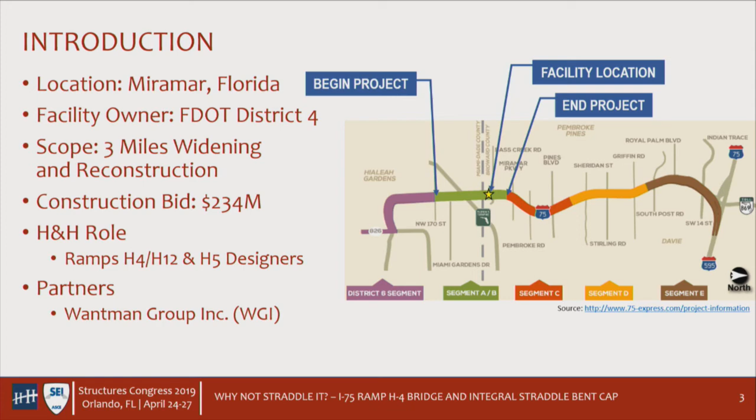It consists of 3 miles of widening and reconstruction for a total construction bid of $234 million. Our role in this project was to be the lead designers for Ramp H4, H12, and H5. On this project, we partnered with Wantman Group Incorporated.

I wanted to give you a brief background and history of this stretch of I-75. It was originally conceptualized in 1961 to connect Tampa and the Miami metro area. It was finally built in 1986 as an 8-lane facility with 4 lanes each direction, and a very wide median reserved for a high-speed transit corridor.

As part of the I-75 master plan, the FDOT in 2012 finalized a PD&E that was later reevaluated in 2013, which decided that this median could be used for express lanes and also save some space for a future transit corridor. This was all done to improve the link between the Palmetto Expressway and I-595, and also help commuters bypass around Miami with a link to the Florida Keys.

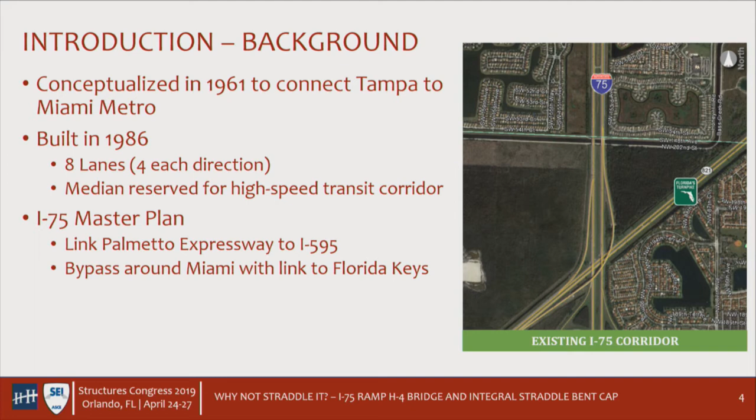So why do we build it? Florida has been growing in the past few years, and that has translated into an increase in population and urbanization trends. For this stretch of I-75, the level of service is F, which for us as structural engineers means being stuck in traffic like 4 or 5 minutes more.

They also wanted to improve the overall system linkage and connectivity, specifically the different modes or modal relationships of transportation. I-75 is a limited facility in this stretch, so there are no pedestrians, so the FDOT mostly focused on vehicular and transit traffic. They also wanted to improve safety, particularly since I-75 is such an important interstate when it comes to evacuation.

Now, ramp H4 connects the southbound express lanes being built in the existing median to a southbound exit on the west side of the heft. That means this ramp needed to straddle at least 5 southbound general purpose lanes and provide 16.5 feet of minimum vertical clearance throughout its length, specifically at intermediate supports.

Our client wanted durable structures that are easy to maintain, and also limited our walls to be approximately 40 feet in height. There were other environmental considerations like maintenance of traffic and noise reduction during construction.

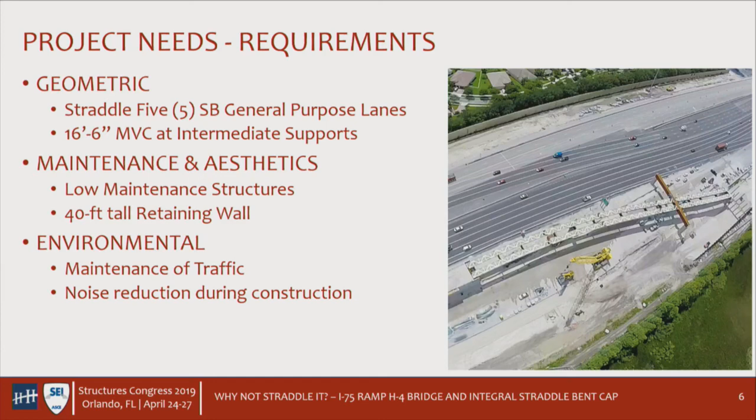So now that we discussed a little bit about the project requirements, I want to go over our design solutions with you, and I hope I can explain our design approach, the analysis, some of the decisions that we made, and the construction aspect of it.

It may not be as interesting as the Avengers Endgame movie that came out last night, but I hope you guys can find some value in it. Please, no spoilers.

So, ramp H4, because of the geometry, the clearances, and the traffic movement that we needed to accommodate, we ended up having a 595-foot-long, 3-span continuous superstructure with very tight curves.

The ramp had a 30-foot and 1-inch wide section that consisted of one 15-foot lane with 2 6-foot shoulders and variable super elevation. One of the ways we were able to straddle the southbound general purpose lanes was by providing a 115-foot-long straddle integral bend cap, along with other pile-supported bents, columns, and C-piers.

At both bridge ends, we provided permanent retaining walls, in this case the FDOT Type 2B, to help us shorten the bridge length.

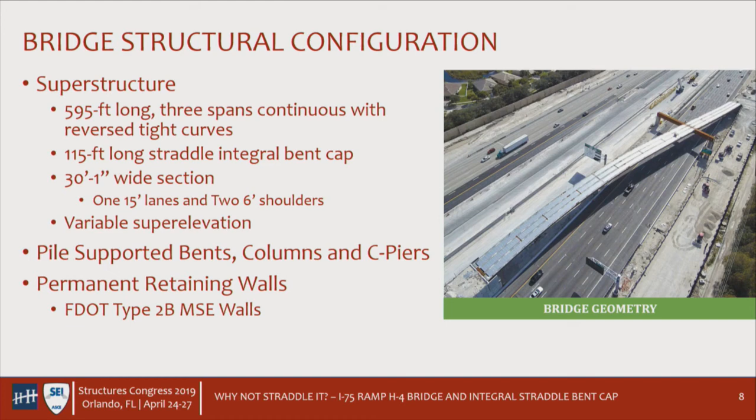On the structural design, as many of you know, piers and bents are very stiff structures. It is not the same for the integral straddle bent cap. When you combine this flexible support effect with the complex geometry of curvature and superelevation transition, you get a very complex structure that is not easily designed by simple methods.

This is why we developed finite element models with three main goals in mind. One, we wanted to understand the behavior of the structure and what the live load distribution was after we introduced this flexible support. Two, we wanted to make sure that the bridge natural frequency didn't show anything abnormal. And three, we wanted to calibrate a design software with the results we got from the finite element model.

As many of you may know, finite element model softwares are great for analysis, but they're not as efficient when it comes to checking AASHTO design verifications. On the right side, you can see the finite element model in its deformed shape due to dead load. On the lower image, you can see how closely both models that we calibrated were, which made us feel very comfortable in our design checks.

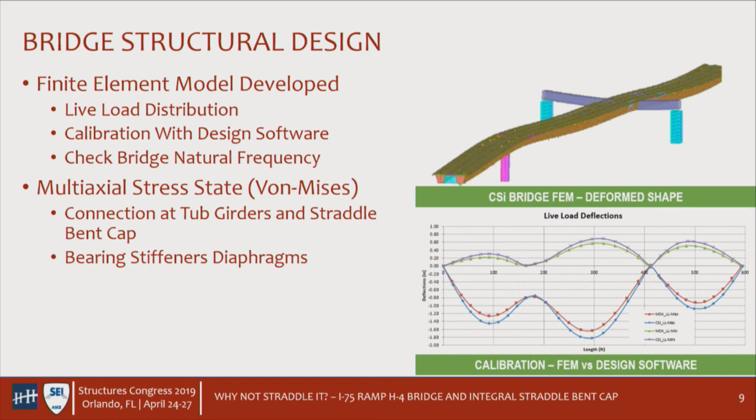We also provided additional analysis, specifically a multi-axial stress of von Mises criterion, particularly at the connection between the tub girder and the straddle bent cap, because of the longitudinal and transverse bending effects we were seeing at this location. We also did a similar analysis for the bearing stiffener diaphragms because of the shear and moments resulting from having a single bearing underneath each tub girder.

The analysis and design resulted in twin top girders, spaced at 16 foot on center, made out of grade 50 weathering steel. Weathering steel was selected because it was the material of choice for our client, and it's very low maintenance.

We had an 80-inch deep web with 20-inch wide top flanges and 72-inch bottom flanges. We decided not to vary the width of the flanges, but instead we varied the thickness of them when it was needed. We strategically did that at field splices that coincided with counterflexure points.

We ended up having a very conventional 8.5-inch concrete deck with half-inch sacrificial. For those of you not from Florida, Florida does not have an overlay asphalt on their bridges.

We also had high-load multi-rotational disc bearings with a fixed bearing at Pier 4. That bearing was strategically located at the pier because it gave us some advantages you'll see later on, and multi- and unidirectional bearings elsewhere.

One of the advantages of fixing the bearing at Pier 4 was that we were able to provide a simple poured joint on the shorter end of the bridge and a modular joint on the larger part of the bridge where the maximum thermal movement was being seen. Minimizing the amount of joints was important for the client because it reduces long-term maintenance.

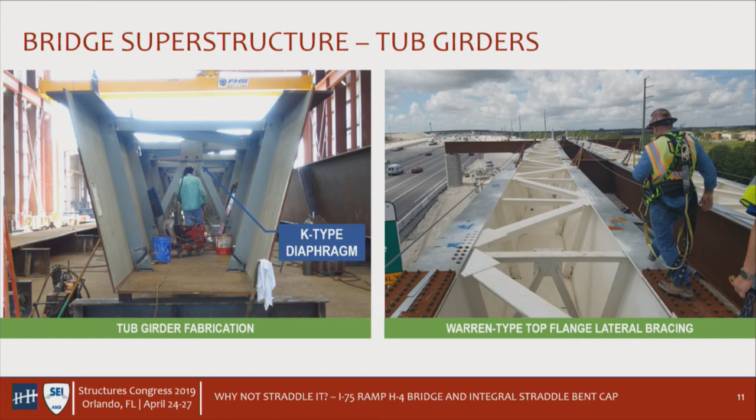We also provided K-type frames and a Warren type top flange lateral bracing because they were the most efficient elements that could prevent distortion and improve the stability of the tub girders during construction.

For the integral bent cap, we detailed it as a box girder. As I mentioned before, it's 115 foot long. The whole length of the box girder is fracture critical. Our analysis indicated that we needed very thick webs and flanges as well.

We wanted to make sure that this integration with the tub girder was done smoothly. This is why we detailed 4-foot stubs on each side that coincided with the flanges and webs of the longitudinal tub girders. We also sized this box girder to allow for handling and transportation of it throughout the state.

On the left side, you can see that before the splicing occurred, those 4-foot stubs kind of mimic the same shape of the longitudinal tub girders. On the right side, you can see the final longitudinal tub girders already spliced into these box girders. We strategically made those flanking spans on the longitudinal tub girders a maximum length of 40 feet to allow the erector to have a lighter and easier element to splice.

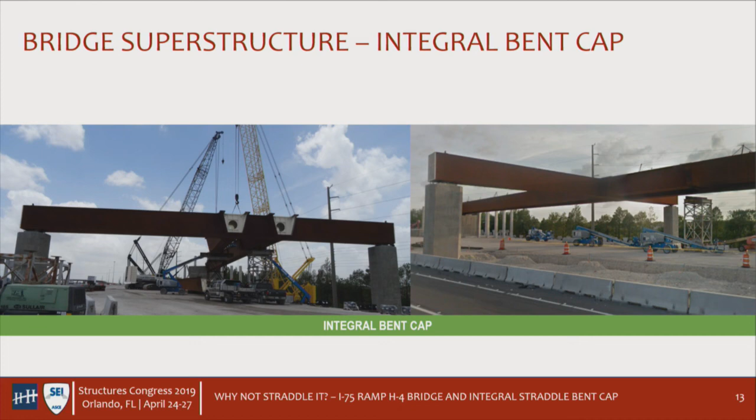Now, on the bridge foundation substructure types, we had a very diverse type of elements selected that maximized and were the best solution for each particular case. Starting on the south side, we have an end-pier wall founded on 24-inch pre-stressed piles. This pier wall not only supports ramp H4, but also supports H12 and serves as a transition between both ramps.

We reinforced the backside of the wall with geogrid that helps this pier wall handle the lateral forces from soil and maintain stability.

We also had independent piers founded on 24-inch pre-stressed piles. These piers are critical for structural stability because they support the straddle bent cap, so they have a lot of conservatism built in. One of the design checks we performed was vehicular collision, because of the proximity of the piers to traffic.

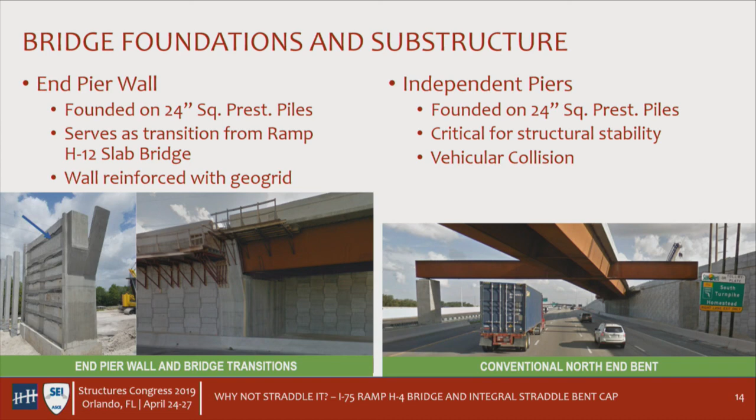We also had C-shaped piers, also founded on 24-inch pre-stressed piles. We chose this geometry to maintain the minimum vertical clearance on the eastmost lane and shoulders of the southbound general purpose lanes. Fortunately, the analysis showed we didn't need any post-tensioning, as is normal with C-shaped piers. I say fortunately because post-tensioning would be an extra element our client would have to maintain and inspect.

On the north end, we had a conventional end bent, also founded on 24-inch square pre-stressed piles. Because we used weathering steel, we had to provide details everywhere, not only on the box girder but also on the substructure, to channel the iron oxide that weathering steel produces as it corrodes. We tried to make sure the iron oxide was carried away from the substructure surfaces to prevent staining.

Now, moving on to constructability, almost wrapping up. On the MOT side, we were able to shift traffic to the existing median since nothing was there, giving the contractor a very wide area, a playground, to build as much of the bridge as possible before shifting traffic back to the final position.

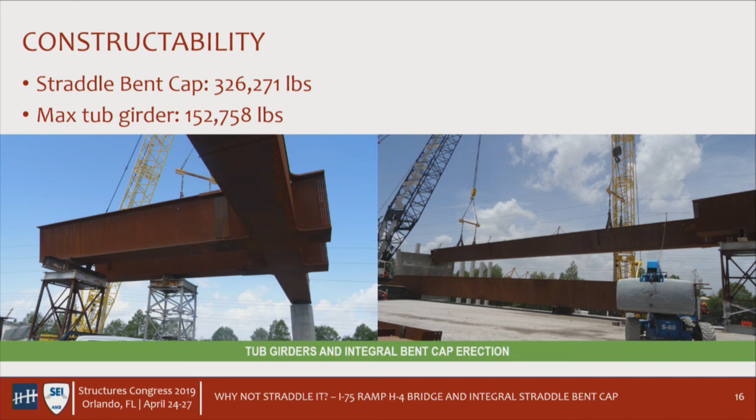Just closing out this project: you can see the effects of this complex geometry driving our analysis and designs, particularly on new infrastructure that's becoming more and more challenging and forcing us to innovate. All of this is compounded in a design-build environment. Thank you everyone for sticking around.